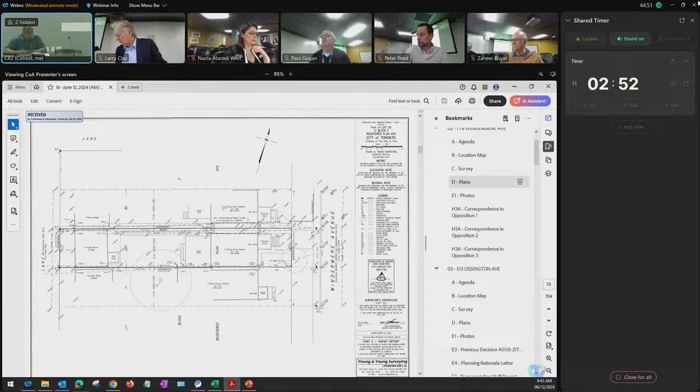The length itself, we are keeping pretty much where the existing deck is today. The length is matching the length of the house to the south, which we do have support on, known as 776.

And then the length itself, right at the end, there is a mudroom that's only 1 story, not a full 3-story appendage.

As for ancillary buildings, the garage, there is an existing detached garage today, which will be removed. And we are putting together a brand-new garage at the back. It is still going to be detached.

The minor variances are setbacks, floor areas, and lot coverage. When looking at the site plan, the two adjacent properties to the north and south, we are again following the footprint as best as possible to what is there today, to mimic the north and south properties.

The only other extra there is a 3-foot extension to the rear, and this is to accommodate larger vehicles today, such as pickup trucks and SUVs, as the garage today is quite short in length.

In looking at Windermere, one of the things that does come up visually while I was traversing the streets to understand the look is that there are many 2.5-story houses on this street, originally built. So by asking for a 3rd story and asking for a minor variance in keeping with the streetscape itself, it's not a street that accommodates bungalows per se, and this will be the first 3-story building.

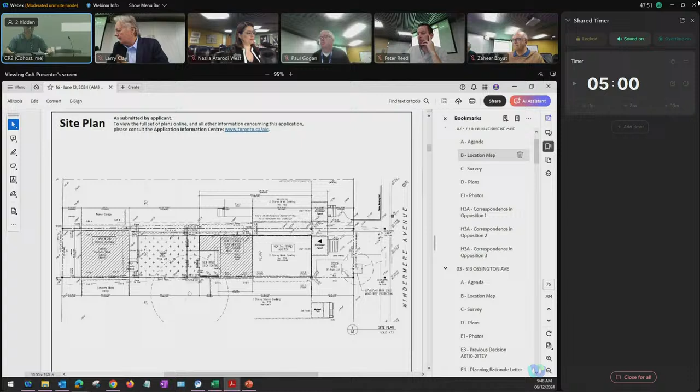Okay. The second question is about the garage height. It was in feet and inches, and I converted it - I think I had it at 5.8 meters. Don't you need a height variance for that? Usually the bylaw requires you to keep it under 4 meters. I'm a little surprised you don't need a variance because it looks like storage or something.

No, it's a car lift, for parking. So I was surprised you didn't need a variance for the garage. I asked the question at the time of our zoning review, and because there was a laneway house being constructed to the south, about 4 lots down, I think that zoning requirement of 4 meters has changed.

Well, I'm a little surprised. I get that if there's a laneway house, but that's because you have accommodation in it. You're not planning to have accommodation in yours? No, there's 2 lifts inside the garage. My client collects cars, so he has a lift going inside the garage where 2 cars will go in, they'll be lifted, and then he can have 2 more underneath. Right, so the garage plans show that.

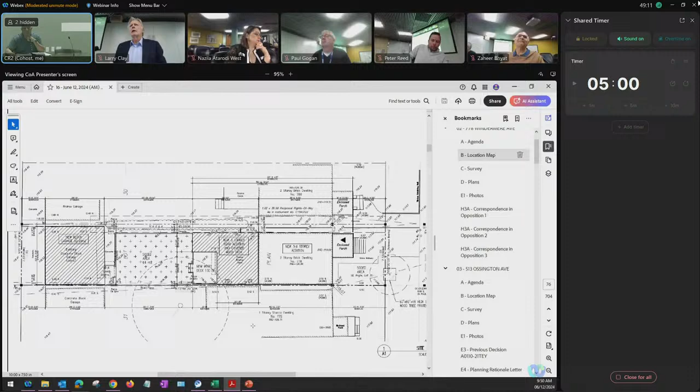I remain a little skeptical on this one. Sabrina, I don't want to put you on the spot, but that strikes me as a little unusual. Through you, Mr. Chair, I'm checking the zoning notice online, and it doesn't refer to a height variance. In any case, if a variance is missed, the homeowner would have to come back to committee with a new application.

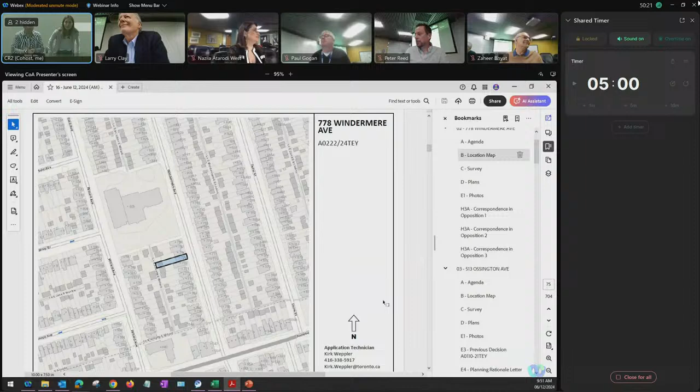Thank you for the opportunity to talk. We've submitted our concerns via a document sent on June 4th to the Committee of Adjustment. The main thing we want to reiterate is that city bylaws have been put in place for two reasons: one, to protect the rights of neighbours, and two, to ensure the city's infrastructure is not compromised and can support new developments. We feel this proposal materially deviates from these bylaws.

The height of the structure is 1.2 metres higher than the bylaws allow, on top of a three-storey structure. The proximity of the house is extremely close to ours, around 5 feet. Both our houses currently are about 30 feet long. Their proposal is to extend the three-storey structure another 20 to 30 feet, up to 56 feet long. With the combination of height and length, this will materially block a lot of our sunlight throughout the day and impinge on the privacy of our back garden.

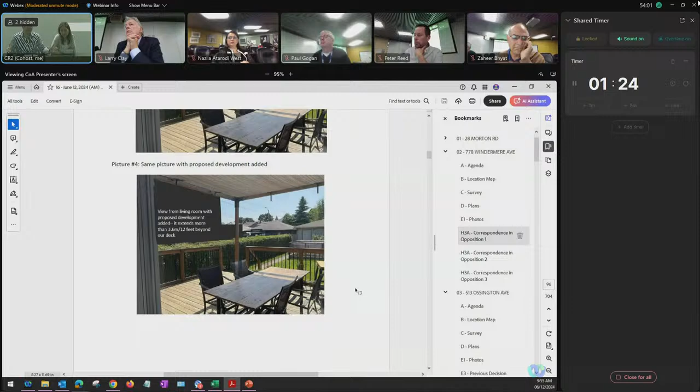The other properties he mentioned on Willard - one has a three-storey, but I don't think the footprint is the same length. I think they've just built it on the same footprint as the existing house and not added the other 26 feet they're proposing. I think that makes a big difference, because the length in combination with the height is where we're finding the biggest challenge.

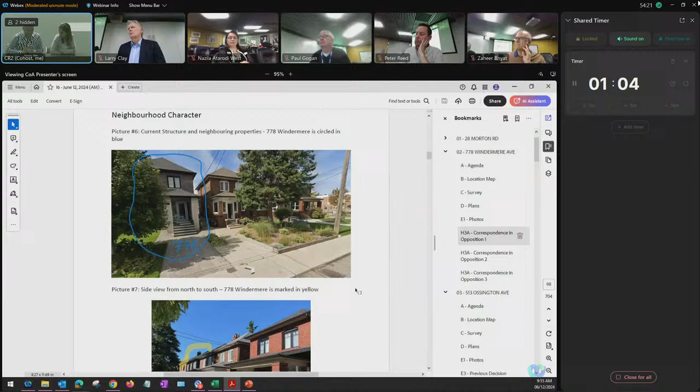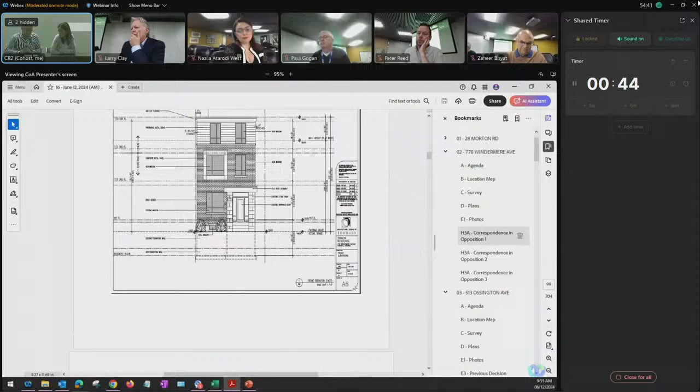And I think the other pictures we're showing also show the impact on the privacy and the shade that will project onto our back garden, and also mainly to our neighbours to the north, who have also submitted concerns with the development. I welcome any comments from the panel on any of the specific adjustments we've objected to in our submission. Thank you.

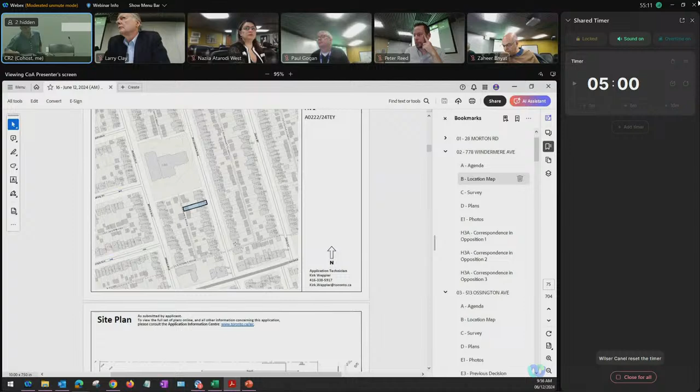The concerns are understood, they have been reviewed. When it comes to the height itself, again, we do address that there are similar homes we are trying to build that are immediately adjacent to this project off of Windermere. Windermere runs north and south.

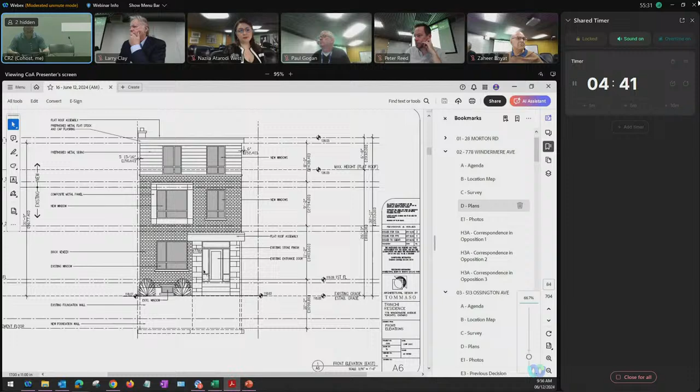We do have houses on Drury, 583, 535, 606. Off Willard, we have 624, 581. They demonstrate exactly what we are looking for to facilitate and accommodate the family requirements. The family is growing. These are smaller homes, restricted with side entrances, so the layouts are not great due to the fact that, to get to the basement, they're just side-loaded.

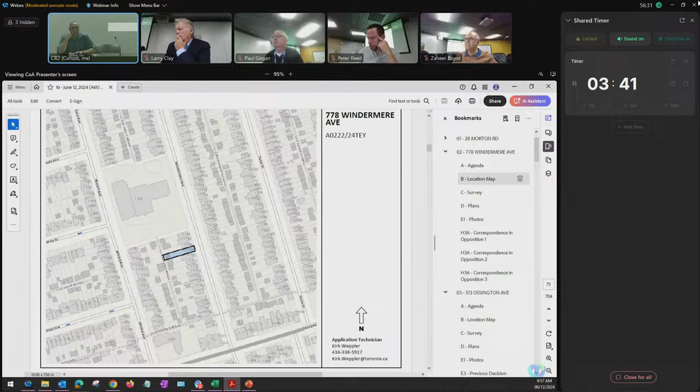As for the concern of the length, once again, we are following the adjacent house to the south when it comes to the depth of the home, and how close it is to their home. This was looked at in detail. Unfortunately, because of the restrictions of the property along Windermere, we have a condition where we're going up exactly the footprint it is today.

So we do have a gable roof. We're going to be removing the gable roof and asking permission for that third storey using the side yard setbacks and the front yard. The rear is a three-storey addition. And if the house is already set close to them, roughly about 5 feet, 6 feet, and we're going straight up, the condition was always going to be there.

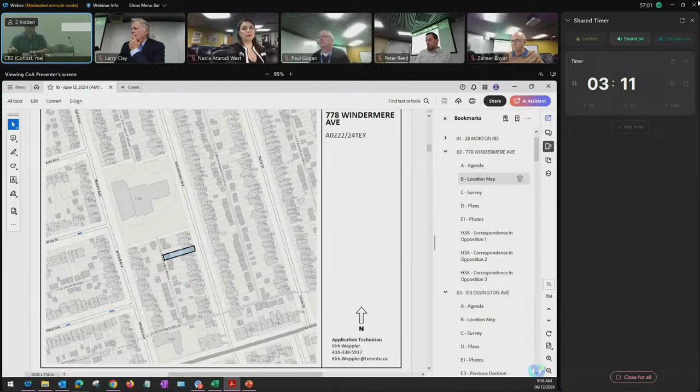As for the landscape, because of the extension to the garage at the rear to make it longer to accommodate the cars that my client collects, it was an additional 3 feet, about 1 meter. And because of the addition to the rear, we ended up with a smaller percentage of landscape. However, looking at the house to the south, with its length and pretty much the same footprint of the detached garage, their landscape area is equivalent to ours being proposed today.

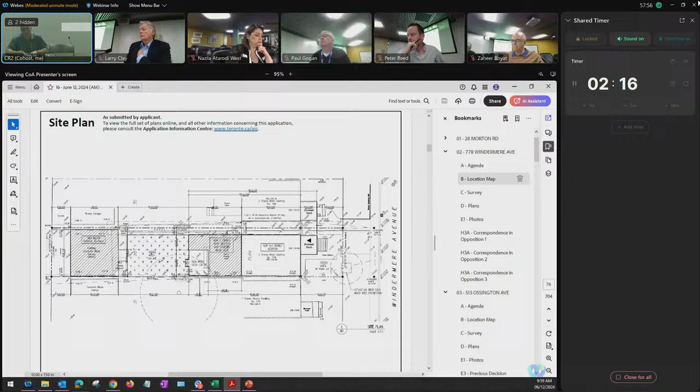To conclude, of the 11 minor variances presented today to committee and reviewed over the last several weeks, 6 of those are of existing conditions. They'll talk about eaves, side yard setbacks, and these are just things that have been triggered because of existing conditions of the dwelling, the single-family dwelling today. That's all I have for now.

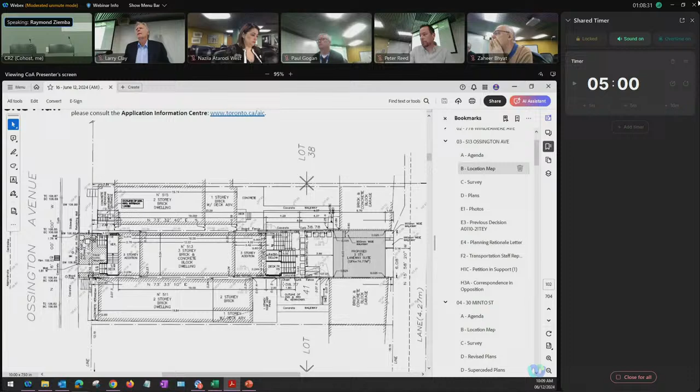Okay, sorry Peter, go ahead. No, you go Larry. I was just going to ask about the stairs in the rear that you are showing on the plan, are those wooden stairs? I guess the question is, is rainwater able to make its way down through those stairs or platforms into the ground? Yes, if you look there are photos attached, they're metal stairs, and water could go through. Okay, thanks.

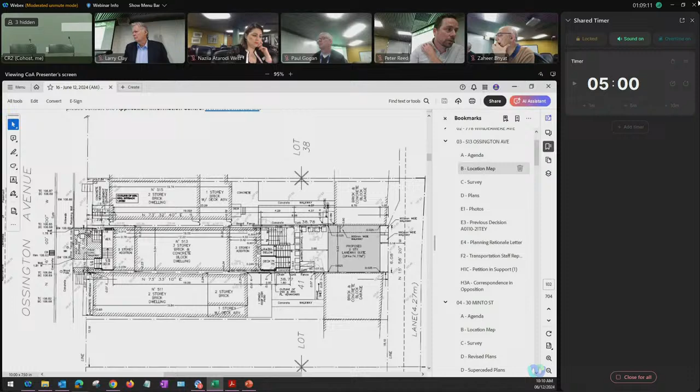Peter. Yeah, thanks, to the applicant, you noted that you're providing more than is required in terms of soft landscaping on the east side fronting the alley, did you say 5.25 square meters? When I did the measure, it was about 5.5 square meters. Okay, and are you okay if this gets approved, if that is a condition of approval, that 5.5 meters be provided? I think it would be better to tie it to plans because I just did an overlay, and that's why I'm saying approximately 5.5, I didn't, I did that as a quick estimate on my own.

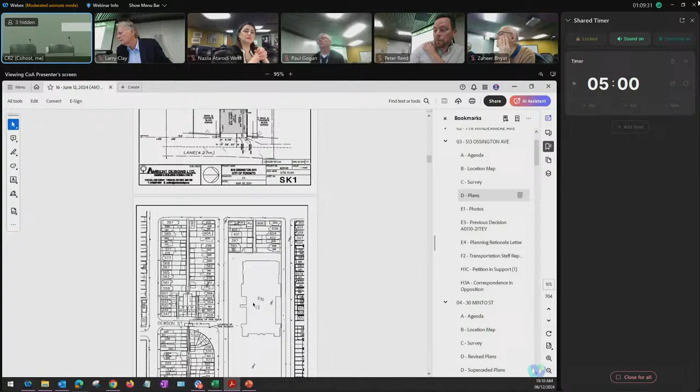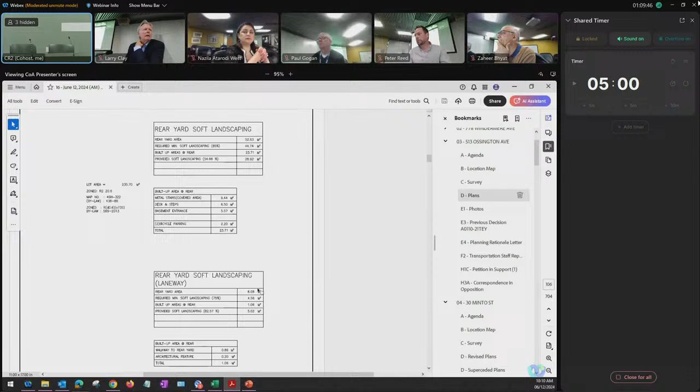Peter: I'll start, thanks Chair. I agree, I mean I wish these applications could satisfy the soft landscaping, and it's a thing we come up against often now, particularly when sites are being redeveloped intensively like this. But I do think there is a benefit in having lots with 5 units through, and I think that kind of variance, particularly if we can make the rear yard against the alley condition green, lessens the impact of it. So I think it's a reasonable application, particularly because all of the built form requirements of the laneway suite are met. Thank you. Anyone else?

No one else? Okay, then I'll look for Peter. Want to make a motion? Sure, I'll move a motion for approval of the application, subject to the condition that a minimum of 5 meters of soft landscaping be provided to the rear of the property between the laneway suite and the laneway.

Motion to approve with that condition. Can I, through you Mr. Chair, have a friendly amendment that transportation also have a condition? The report on June 5th, the 0.37 meters. Okay, if that's accepted, then thanks.

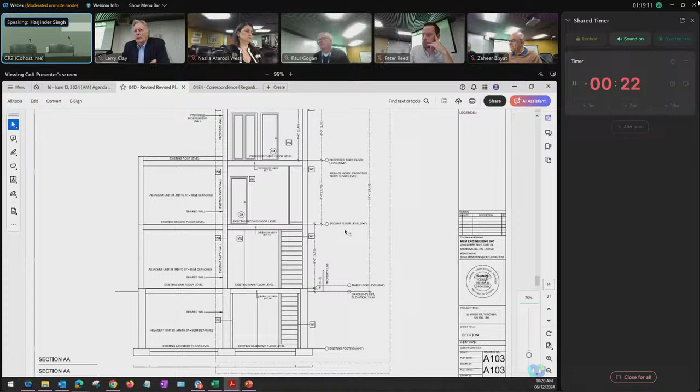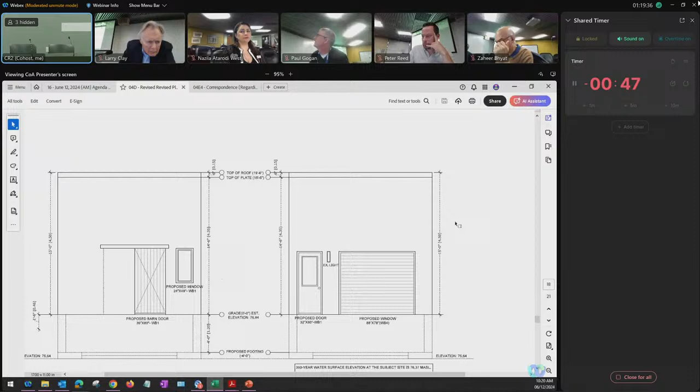Okay, let's just, I mean, it's really important that we have the correct and accurate information. Through you, Mr. Chair, it is under the very late materials, which the members wouldn't have received, so we'll have it presented on the screen. Is that what we have on the screen right now? Okay, can you just zoom in so the members can see the 4.5 meters? Okay, so these plans were submitted, I'll just get the date, sorry.

So is that a sloped roof then? It looks like, is this 4.35 on one side and 4.5 on the other? Am I reading that properly? Yeah, so it would be the highest point, right? So it's a bit of a shed roof then? Yeah. So these plans dated or received June 10th.

Okay, if the committee is inclined to approve as amended with condition. Okay. All right, and the planning condition is tied to these most recent plans, right? Through you, Mr. Chair, I believe the planning condition was the June 5th plans. So if they've been recently revised, then I would change the date to June 10th. Right, okay. That's great. All right, I think we're clear on this one. Any further questions of the agent?

Okay, we'll take this into committee.

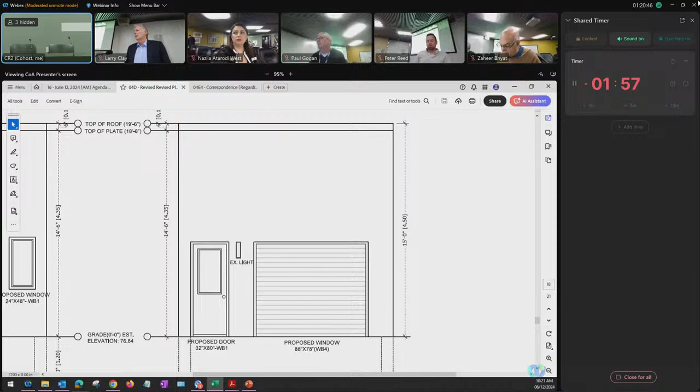Who wants to start? Nazila? Yes, through you, Mr. Chair, just a quick question from Madam Secretary Treasurer. So we received the staff report dated June 6th, and it had a condition. So if we want to put the same condition, do we need to update it with this revision, or can we keep the same condition attached to the revised drawings? Through you, Mr. Chair, you can use this condition, but just update the June 10th date to match the most recent revised plans, or you can impose your own condition approving the site and elevation plans dated June 10th. Okay, thank you. Okay.

All right, anyone, Paul? I'll move this application. That we approve it as amended, with variance number 1 and the modification to variance number 2 to 4.5 meters as the ancillary building height, and with the removal of items 3 and 4. I don't believe there's any comments from TRCA, but no additional comments. And I do find it minor in nature. I think the proposed modifications, there are no variances for the proposed third floor addition, and I think all the requested variances are minor in nature.

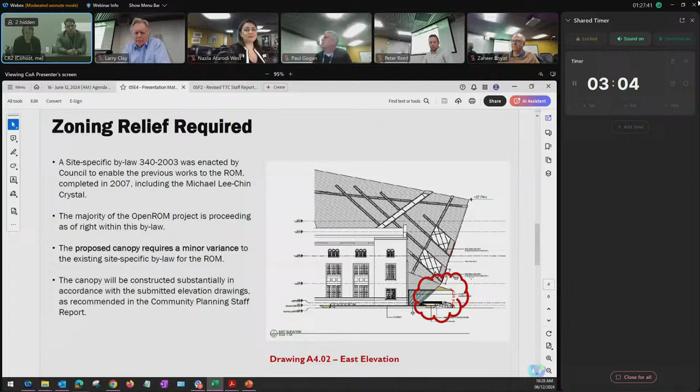There was a site-specific bylaw to enable the original crystals and the development in 2003, and a canopy of this nature was not anticipated at that time, so there isn't a standard for projection. What we're seeking is to enable the canopy to project. The canopy itself varies in depth because of the nature of the angles of the crystals.

It's an overall height of 4.84 meters, and the depth varies depending on where you are within the crux of those crystals, between 4 and 16 meters deep. The image on top shows the full extent of the canopy as if the crystals above were removed, and the image on the bottom shows how the existing crystal will actually project over portions of the canopy, giving a three-dimensional expression within the crystal.

There's no projection into the right-of-way, which was the subject of comments from ECS that was clarified with them, so they no longer have any concerns and withdrew that comment. The canopy is fully within the property line.

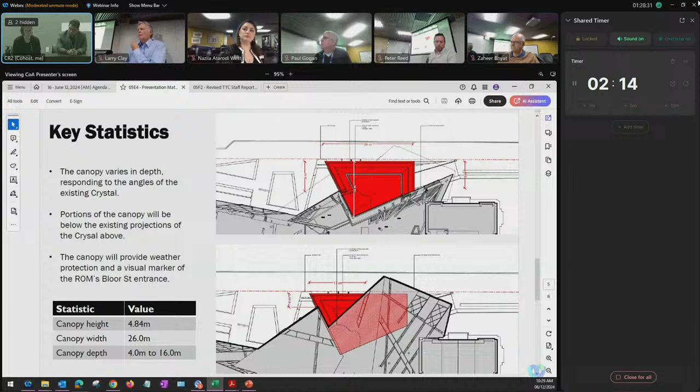From a planning perspective, this clearly meets the four tests of the Planning Act, being quite minor and meeting the intent of the OP and the zoning bylaw. It is a desirable change for the reasons I mentioned regarding marking the entrance and weather protection, and will contribute to a significant updating of a very important cultural landmark here in Toronto and Ontario as a whole.

We note there is a recommendation from planning that, should the committee approve the application, it be built substantially in accordance with the drawings, and we agree with that recommendation. I've mentioned that the ECS comments have been clarified.

Urban Forestry's comments have been clarified as of this morning. They had inappropriately identified a tree being impacted by the canopy, which in fact it does not, and they clarified that via email to us this morning. As for the TTC, we understand their standard comments related to the planning application, so we accept those notes from the TTC.

So I think hopefully that clarifies things. Yes, thank you, that's all we have. Any questions, panel?

Just a detail question: where does the water go? Good question. There's a central column, and they all back-feed towards the central column, going down through the foundations.

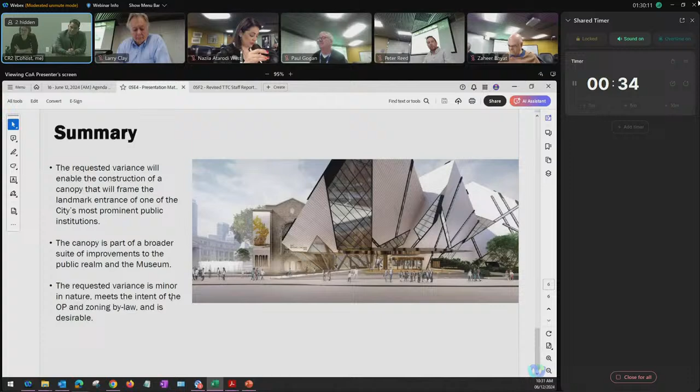I've heard that the applicant mentioned that, because we have a report for condition number 2, urban forestry, that this condition has been waived. Yes, as of this morning we've clarified with them there's no tree that they thought was being impacted.

So then, through you, Mr. Chair, I would err on the side of caution here. We can still impose the condition, and it would just automatically get cleared before the building permit, just because staff haven't received that notification. Thank you, we've all been there. I don't think there's a tree, but...

There's no trees there. It'd be nice to have a couple trees there, actually. But I think that's good advice, we understand that, it will get cleared quite quickly.

Okay, all right, let's go into committee. Who wants to take this? Peter will take this one. Thanks, Chair.

I think this is a good application, a good project that improves the pedestrian realm and the accessibility of this. I can see no negatives to approving the variances being asked for. So I move approval subject to community planning condition, urban forestry, and TTC conditions.

Okay, and there's no longer a transportation condition, right? So, okay, seconded by Ms. West. All in favor? You have your approval. Thank you very much.

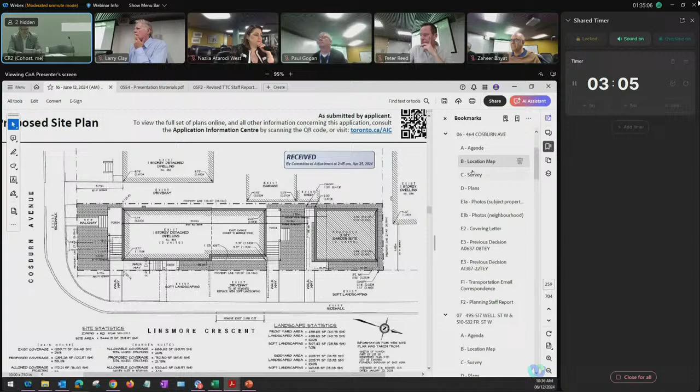If I can get page 11, the east elevation on the submitted plans. So the variances for this garden suite are basically generated because of this lot. This is a corner lot. There are flanking setbacks because we have properties to the north that front onto Linsmore. And one more, page 11 should be the east elevation of the garden suite. Keep going.

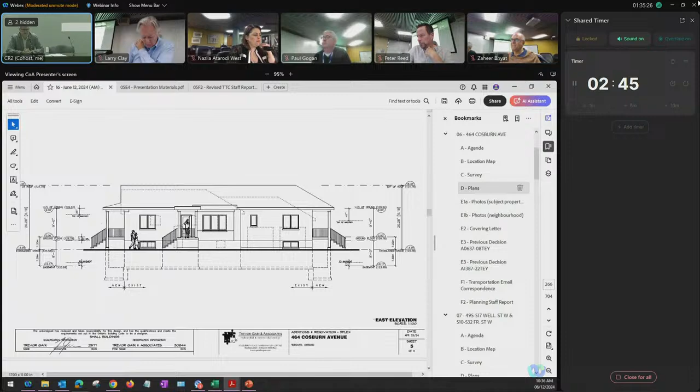That's fine. So the dotted outline that overlays on the structure — those are the existing setbacks and the angular planes. It's basically the size of a single car garage, 1 story. Any development in this rear yard, including the previous garage that we did get approved at this committee, which was a double car garage, included minor variances in massing, size, and setbacks. What makes this application a little unique is that when you drop the garden suite bylaw on top of this, we end up with these variances.

But this is a corner lot, so typically their spatial separations and setbacks address mid-block houses. This is a corner lot, so everything is addressed to the street, Linsmore Crescent. By doing so, spatial separations, overlook massing, and even soft landscaping are mitigated based on the large boulevard.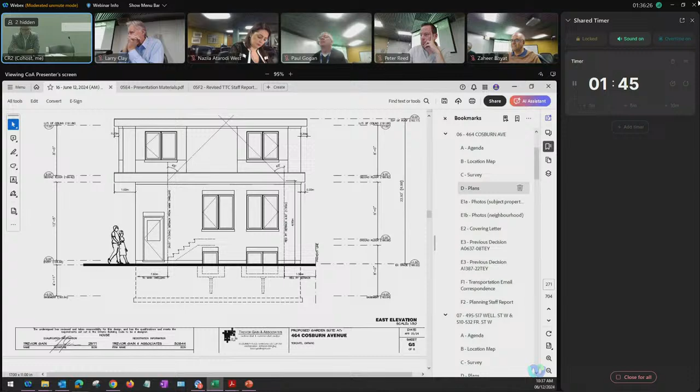Can you bring back the site plan, page 1 again? This boulevard section, the dark shaded area, is our soft landscaping proposed on the property, but there's another 5 meters of soft landscaping to the sidewalk. There's an existing double car garage at the back of the bungalow that will be converted to habitable space, so that driveway on private property and on the boulevard will be converted back to grass. The only hardscape that'll come across now are just the walkways to service these units.

Again, the spatial separation: we have 5 meters between the bungalow and the garden suite, which accommodates a 1-story structure, but for 2 stories we need 7.5 meters. Again, this is mitigated because of the orientation and the open side of Linsmore Crescent on the flanking street.

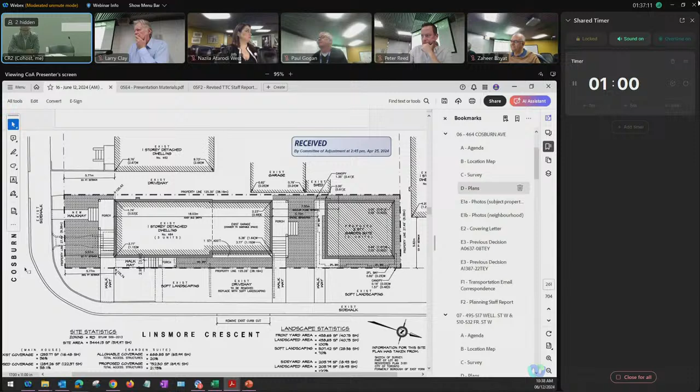Regarding massing, if I can get my submitted photos up, under supporting materials — I think it was submitted on June 4th. Yeah, thank you. So across the street, as I mentioned, is a mixed-use building, which is photo B.

Actually, we got different photos. Anyway, so there's a mixed-use building, 2 stories. That building extends for about 30 meters from front to back. Our proposal is 32 meters front to back, which also includes that 5-meter separation.

So the massing on this property is all pushed towards the back of the property. We're maintaining the bungalow status at the front, which continues along Cosburn, but at the back is the massing. So eventually, like most bungalows in East York, there will be 2-story structures to the rear.

So what I'm trying to get at here is that I think our massing is not really out of character based on what's happening across the street and probably what's going to happen in the neighborhood as all these properties get developed. So just to wrap it up and to conclude, we do feel that this is an excellent opportunity towards the housing crisis as the introduction of 4 new dwelling units, 5 in total.

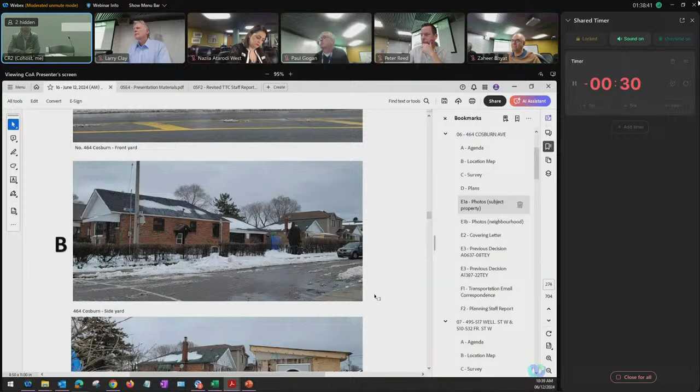Unfortunately, this does not fit into the mold of what a garden suite is according to zoning bylaws and city planning. But given this is a corner lot, given it's on a major transit corridor, Cosburn Avenue, the proximity to parks and schools, the mix of 3-bedroom and 1-bedroom units, we think it is desirable. You just simply have to think outside of the box on this one based on its context, because it has a great potential for positive impact on the community if you approve it today.

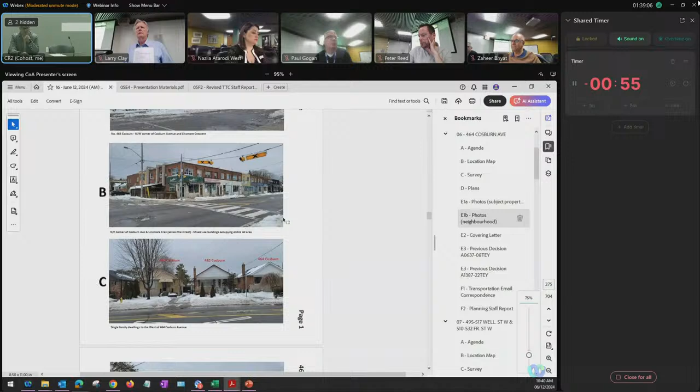You or your client have had discussions with the surrounding neighbors, have you? We have, that's why we have no opposition. We vetted it all out and just told them what we're doing. Like I said, they've owned it for a long time, so they know all the neighbors quite well, and we have no opposition.

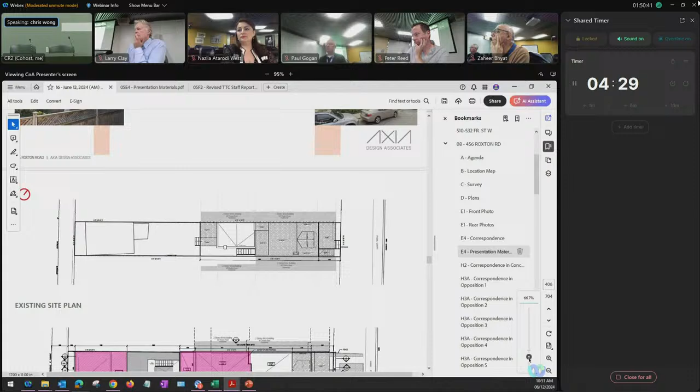We're proposing 2.5-story additions at the back with a 3rd half floor and a terrace facing the backyard, along with a laneway suite in the rear yard abutting the laneway. There will be a total of 4 residential dwellings on this lot, replacing the existing 3.

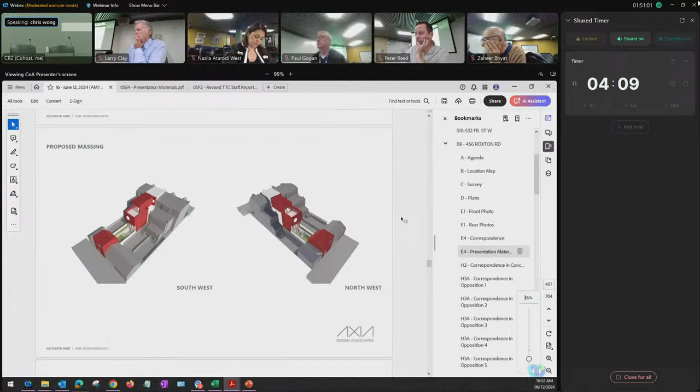Here are some of the massing views. This one is from the backyard, with the proposed shown in red. The next page shows the views from the front, which we are keeping pretty much as is.

The proposed ground floor and basement will be 2 separate 1-bedroom units, highlighted in green, while the 2nd and 3rd floor will be a 3-bedroom residential unit, and the laneway suite is a 2-bedroom unit. These will all be purpose-built rental units, aiming to supply the much-needed rental market in the city.

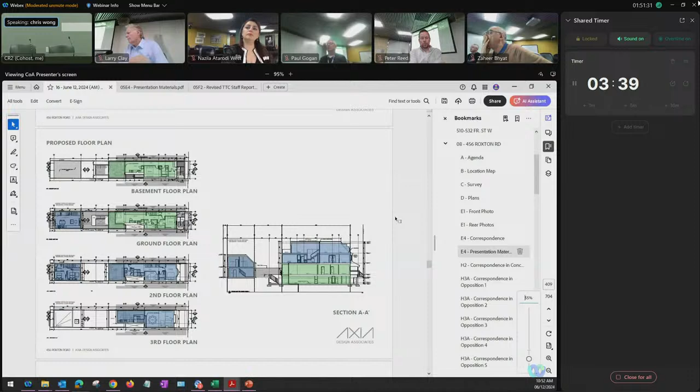Access to all these units is from Roxton Road, except the laneway suite. Given its proximity to the Bloor subway line, the owners have committed to only rent to people who do not own cars, so we do not intend to add any additional parking load to the neighborhood.

Currently, we are seeking 3 variances. The first 2 are related to the percentage of green space on the front yard, and the third is related to the location of the stair to the basement unit, also at the front. All 3 variances are pre-existing.

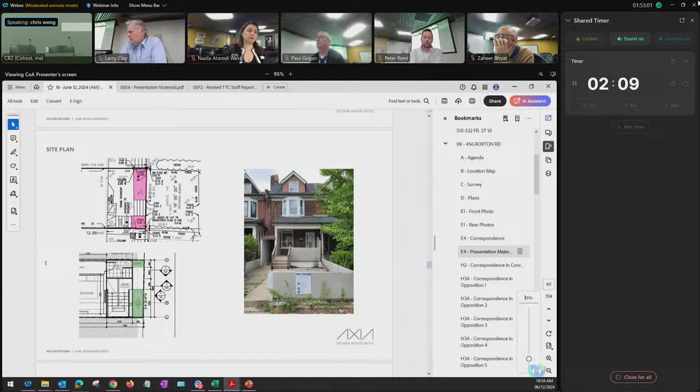The areas that are left are highlighted in green and will be planted. We also intend to add large planters between the front property line and the sidewalk. If you go to the next page, you'll see the next rendering.

This is outside of the property line, so technically the area doesn't count. There's a total of about 14 square meters, which is larger than the zoning requirement of 12.63 square meters.

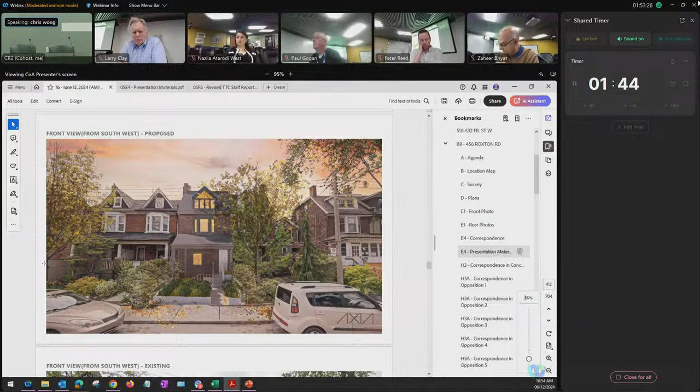Lastly, we also want to indicate that we intend to respect the heritage characteristics of the existing buildings that make up the unique streetscape of the Roxton neighborhood. We intend to keep the front facade as close to the original as possible, except with new glazing and a bay window upgrade, as the building currently has some moisture and thermal insulation issues.

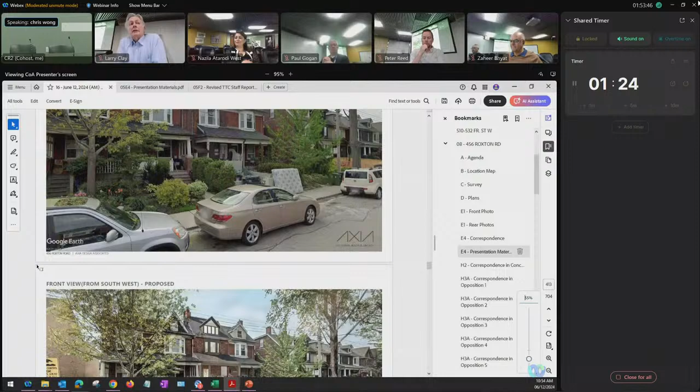On the 3rd floor rear, there's a terrace. I was looking at it and I can't quite tell, perhaps I'm not reading it accurately, but I believe it's on the east and west sides. Is there overlook over the neighboring properties from that terrace?

Currently, the north side has a terrace. I don't know if the south side has one. But the terrace, the north side terrace is, if you see on this page, go back a page, you see the north neighbor's extent is sort of east of the new extent of the terrace. If I explain that correctly, sorry if that's confusing. I can't quite see it, but you see the north neighbor? This is on the right side of the image, the top of the image.

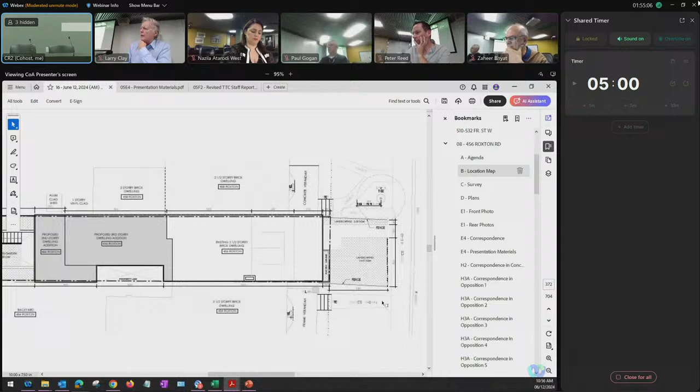Why don't we pull up the rendering? Can we pull up the rendering in the presentation materials? Sure, yeah, the 3D model rendering. I think that shows it a little bit more clear. Yep, just a little bit further down.

There it is. So I think your question is with respect to what looks like a terrace on the top floor, is that right? I think so. Is it on the second floor, not the third level? Or is it the third level? It is the third level. The terrace is on the third floor for our proposal.

So it looks like there's a wall there. Okay, there's a wall on one side. Is it a wall on both sides? There's a sort of setback on the south side. Okay, so it's almost like a light well kind of scenario. So there shouldn't be any overlook issues? No. Okay, thank you.

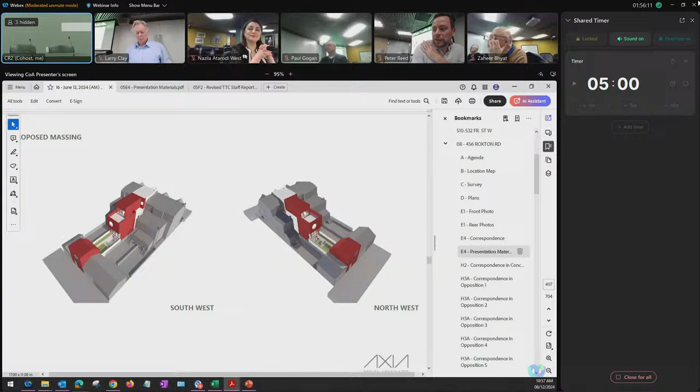Okay, thank you. Anything for Peter? Just one thing to the agent. As you know, there's a lot of neighborhood and neighbor concern, and their concerns are generally about the built form. But I'm just confirming that all the extension in the back and the laneway suite, those are as of right. Correct. Yes. Okay, thank you.

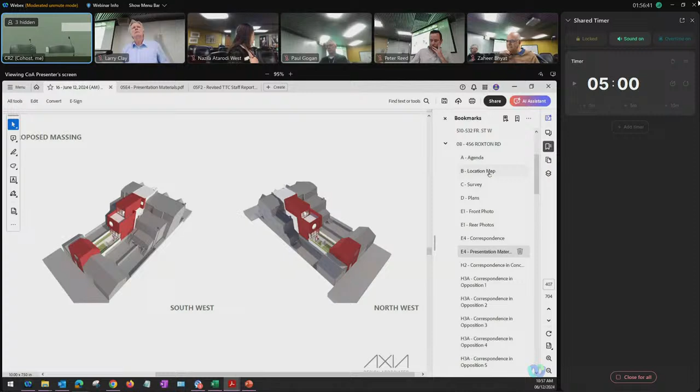Good morning, sir. Good morning. My name's Howard Monroe. I reside at 460 Roxton Road.

We have some concerns about this renovation, and I get that the city's trying to increase density in the neighborhood, and this house has been derelict for a long time, and I totally support the renovation.

We do have some concerns about the landscaping reduction in the proposal, decreasing landscaping from 100% to 51.8%, and 75% to 20%. This raises a lot of environmental issues, aesthetic issues, and privacy issues for the neighbors.

The agent did say that there's a lot of concrete in the front, but the rules for landscaping, the rules for zoning are put in place for a reason. If there was a pole in the way, or some crazy thing that you needed a variance for, that's not the case with this building. Rules are rules. As citizens of Toronto, we have to abide by these rules. Your job as the Committee of Adjustment is to uphold these rules.

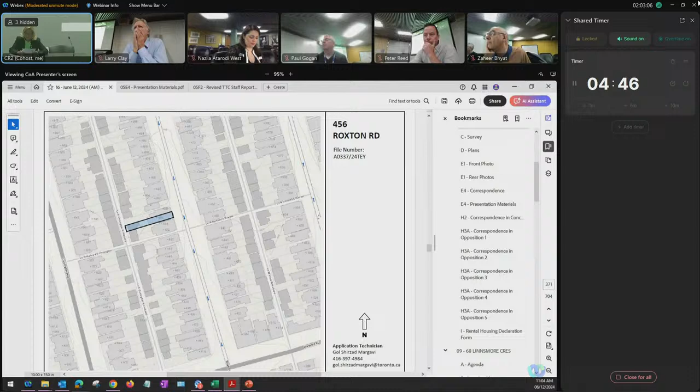My name is Alicia Stefurek. I'm the owner of the triplex at 458 Roxton Road that will be directly impacted, we share a wall. I've been the owner of the property since 2010. It's currently a multiplex housing divided into 3 residential units. I was providing drawings from 1996. The 3 units are contained within the original envelope of the building, built in 1904, and meet the requirements of the FSI, Floor Space Index, prior to 2023. Over the last 14 years I've spent hundreds of thousands of dollars updating each unit: kitchen cabinets, flooring, fire safety, and most recently, during the pandemic, I updated all the electrical service, furnace, windows, hot water tank — basically everything possible given the conditions at the time.

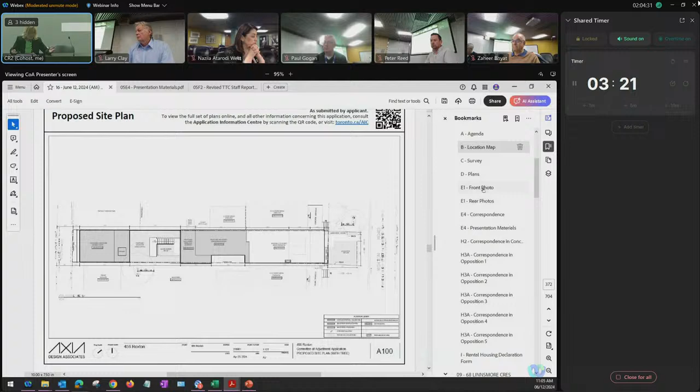The proposal directly affects me. The 3-story addition basically blocks the entirety of my roof deck on the 3rd floor. If you look at my correspondence materials, I submitted a whole binder of drawings showing all the views from the 3rd floor — it's a 3-bedroom unit, and that outdoor space is the main attraction. There's going to be a 15-foot wall, 40 feet long. There'll be no light to the bedroom, no light to the roof deck, making it basically useless. It'll decrease my rent and also decrease the value of the property.

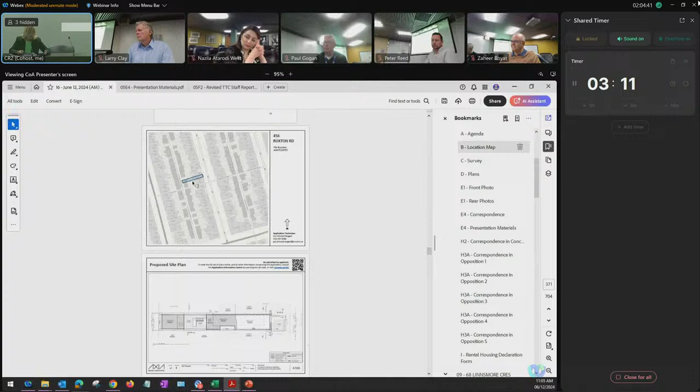Also, the two-story addition will block all the natural light to the kitchen window of the unit on the second floor. After all the hundreds of thousands of dollars I put in — I invested basically for retirement — in one year they purchased this property in 2023 and most likely will sell it after construction is finished. It's going to directly decrease my income, decrease the value of my property, and negatively impact my financial status. So I urge you — are you able to bring up my supporting documents, my binder?

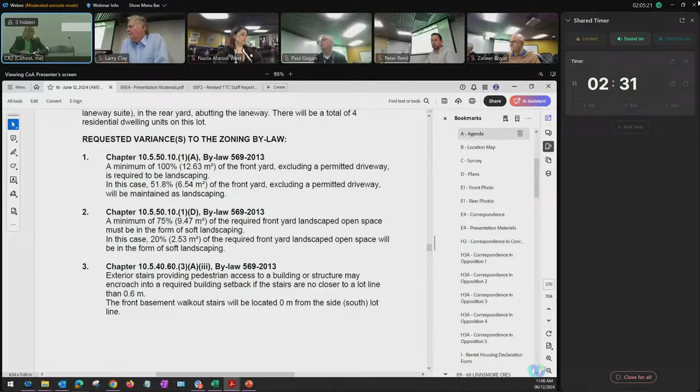Yes, we can bring up the views from the roof deck. So basically, it's going to be people looking at a blank wall. If you look at their massing model — I'm not sure what time of day that massing model was produced — but basically the entirety of my landscape, my garden, the roof deck will be in shade most of the year.

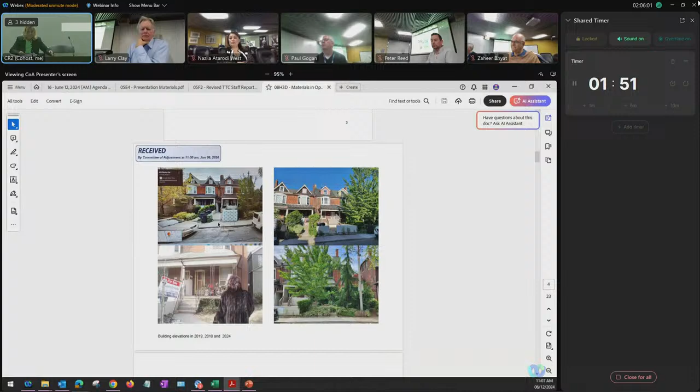And interestingly, when you ask about privacy issues, they're going to completely block my third floor deck, but they've extended the building so their own roof deck isn't obstructed and gets entire views over the neighbors. So there is direct overlook. And interestingly, they put in a solid wall around their terrace so they get complete privacy while we get overlooked. They've blocked the entirety of my roof deck and extended beyond it so their tenants get the benefit and increased rent. That's my garden that I've completely landscaped — it'll all be dead because there'll be no sun.

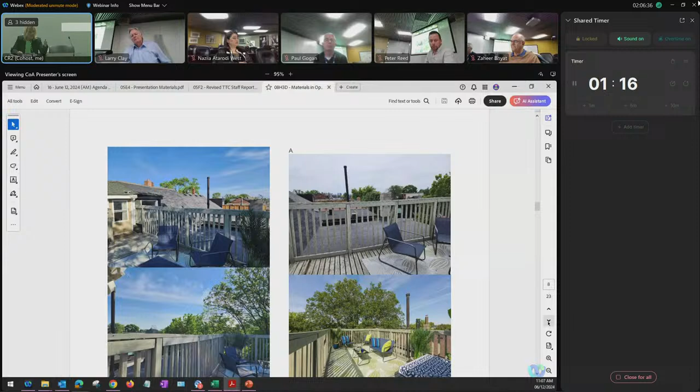That's the roof deck. So that's one window—obviously the two buildings are similar, they match, they're built at the same time. There'll be no light, no view, no sun. And I'm almost positive the roof deck will be damaged, the basement will be damaged. Anyway, that's it.

It's a rental unit, so during construction there'll be noise, there'll be dust, and it'll be difficult to rent. It's been a rental property for 30 years, so my tenants, the people living in my multi-unit, will get diminished services, and you're prioritizing people building after 2023 when the zoning changed.

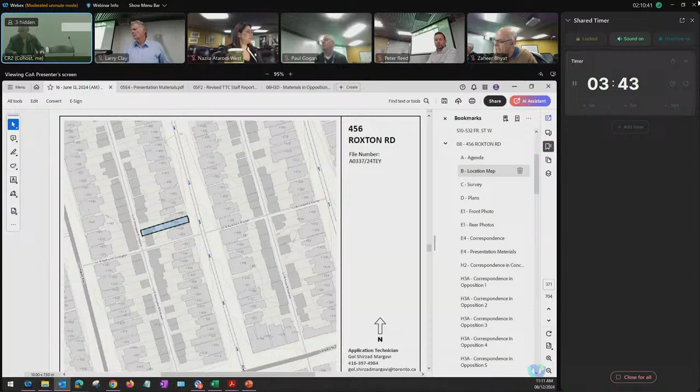He says they're only going to rent to people who don't own cars. Well, we don't know—you can't get rid of tenants once they're in. They have to do something egregious, okay? There's already a shortage of short-term parking. I've observed residents of Ossington Avenue parking their vehicles on Roxton. We cannot sustain this greed-motivated, over-large development.

Further to that, the agent mentions that he will plant on a, quote, city boulevard, unquote. There is no city boulevard. It's the house, a sidewalk, a narrow curb, and the street. There is no boulevard.

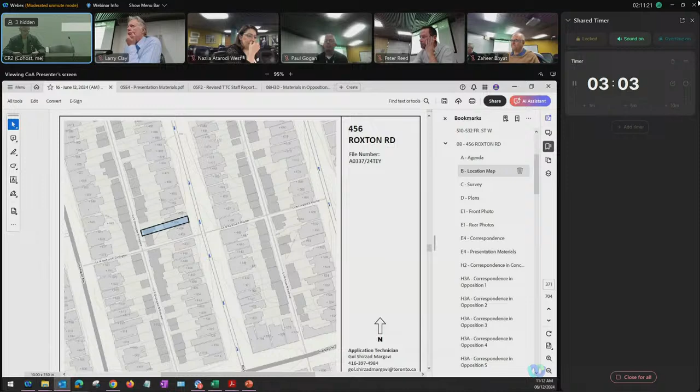We're concerned about potential noise and garbage and littering. I mention it because I've observed it in neighboring places. More people means more garbage and more noise. This place could very likely become an Airbnb or short-term rental. We have no control over this. This is going to put even more people in the neighborhood who have no vested stake in it, and more noise, more garbage.

As Howard mentioned, there are 2 mature trees—one at 454, a big tree, and one on Howard's property. If a root gets cut and the tree dies, or branches are cut and the tree dies, sure, the developer's going to have a fine. Is that just the cost of doing business?

I'm very concerned about the Laneway House. The Laneway House next to my place at 450 was a 3-year project. The noise, the dust, the impact on laneway traffic, like a cement truck ran over the apron in front of my garage, cracked it to pieces. I had no redress for this, no matter what I said, and I can't afford to launch a lawsuit.

Furthermore, where are all these construction vehicles going to park? How can people get into their garages with these construction vehicles? Just the other day down the street, there was a big cement truck. Nobody could pass. And on top of that, even if you can, these vehicles very often get in the way of people maneuvering their own cars to get into their garage. If these big vehicles park on Roxton, what kind of impact is that going to have on traffic, particularly on garbage day?

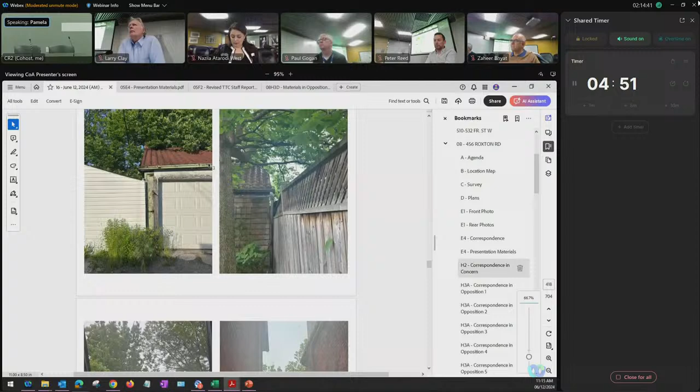One item in particular is the property line. It seems that it's going on top of it and in some cases actually over it. In particular, the second floor addition would go over into our property line, but the build itself is crossing it over or touching it a little bit more than I think is probably allowed. The tree has been mentioned as well. We do have a substantial tree in the back, and I am somewhat concerned about how that will survive all the backyard renovations.

As you can see with this photo, this is the garage that we currently have. I'm not sure, based on the designs put forward, how they would plan on building it without knocking into our garage and possibly damaging it. As an old garage, any kind of shifting or hitting of it would probably damage it and not allow it to work properly. So there are some concerns about how close they want to build it.

In regards to the laneway house, as I mentioned, we are concerned about the touching of our current garage. The eaves trough that is there, I don't know if that's actually been taken into consideration. It is a small lane that we go into, so anything that goes out would make it very difficult for us to pull into our small garage, which we depend on for parking.

And of course, the addition itself is probably our biggest concern. There are some photos where we did mock-ups of what we feel it would basically essentially put a wall into our backyard. As you can see here, our view into the backyard would remove most of the green that we can see. For many of the windows we look at, most of our windows face west because we are a very narrow property. So basically any window I would be looking out would be looking out onto walls, losing a lot of the green open space that we really quite enjoy.

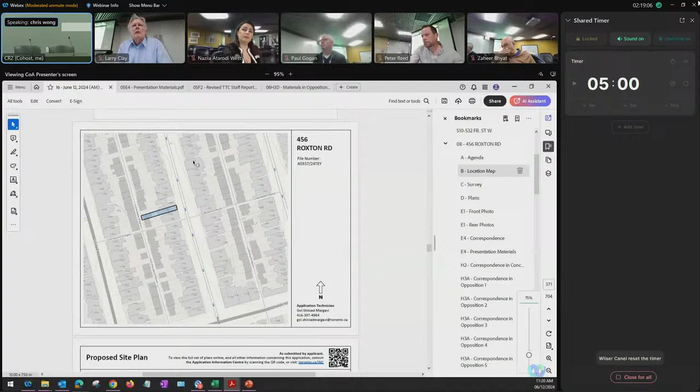I have. First of all, in terms of the smoke alarm, I'll contact the owner right away and get them to turn it off. I'm not too sure which one it is, but we'll rectify this immediately.

In terms of the other concerns, some of the major ones like light, sun, and view - we are all located on the west side of Roxton Road, so every property receives western sun, and of course views to the north side. So for our north neighbors, yes, we do block a portion of it, but at the same time the amount of light you can receive in the afternoon is still there. We're not blocking any of that.

And to our south neighbors, I understand there's going to be a wall built up to it, but with all due respect, we are working within as-of-right conditions, and these pertain to the length and the setback of the proposal, which at the moment has gone through the setback applications. With all due respect, that's not the variance we are seeking right now.

In terms of the noise, I understand there will be noise during construction, and we will stick to the schedule as allowed by law, and try to minimize any kind of inconvenience it may cause. The tree, of course, is a concern for our neighbors and also for ourselves, so we have an arborist on board and will follow all instructions from urban forestry, which I believe is condition number 1 and 2 at the moment.

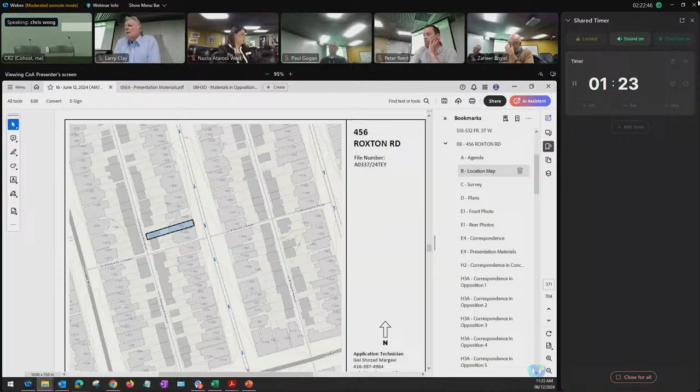Sorry, one more thing about the landscape. As I said before, this site is unique in that the property line comes all the way up to the porch, so there's very little area for us to do landscaping, but we are committed to landscaping outside of that line up to the sidewalk, as you can see from the images and the site plan. Sorry about that, Mr. Chair.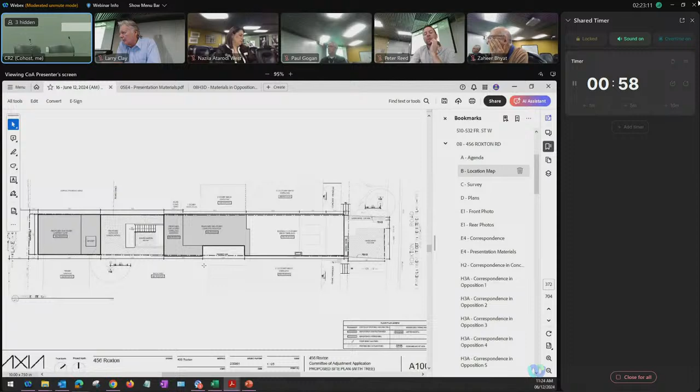Thank you. If we could pull up A100 - that's exactly what I was looking at. I'm looking at the southerly border. First of all, it does appear, at least from this rendering, that your structure is poking outside the property lines a little bit on the proposed second-story addition. I wonder if it's a graphic issue, like the printout.

No, I think you're going to have to resolve that boundary issue. But also, you're building the second floor addition right up to the property line - you don't require a setback? It strikes me that there is typically a setback provision between you and 454. I appreciate that's not a variance before us, but I'm going to check with Sabrina on the zoning notice - don't you require a setback for that?

And it looks like for the laneway suite, you've got an as-of-right laneway suite, but you're right up to the property line on both sides. Is there no variance required for either of that? We do not receive any variance in both situations. Okay, we don't have that before us, so the zoning examiner hasn't identified that as a variance - it does seem odd.

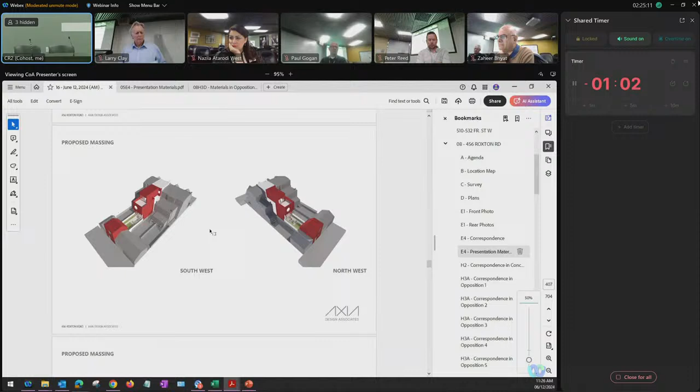Anyways, thank you. Panel, any questions? Zaheer? Thank you, Chair. I was just going to come back - thank you for the explanation regarding the front yard soft landscaping issue. Just looking at your presentation materials, I come back to the question I had earlier about your third floor terrace. From the 3D rendering, the southwest image, it looks like you've got overlook on both the north and south sides.

So we are interested - we can do a privacy screen if that's needed. Yeah, I think that would be quite important to have there. I think one or more of the people in opposition raised that as a concern. So I'd like to add a condition that privacy screening be provided on the north and south sides up to 1.5 meters. Okay, yeah, we can certainly do that.

Thank you. Paul? My comment is just - I was surprised that there was no setback for the garden suite on the north and south. And I think the graphic issue is, when you have common walls on attached buildings, once you leave your attached portion, you have to comply with the building setbacks and property lines as well. So you should look at the graphic, at the way it's drawn, because it's shown as extending walls that are currently common forward, which won't be common in the future. I think you should look at that going forward.

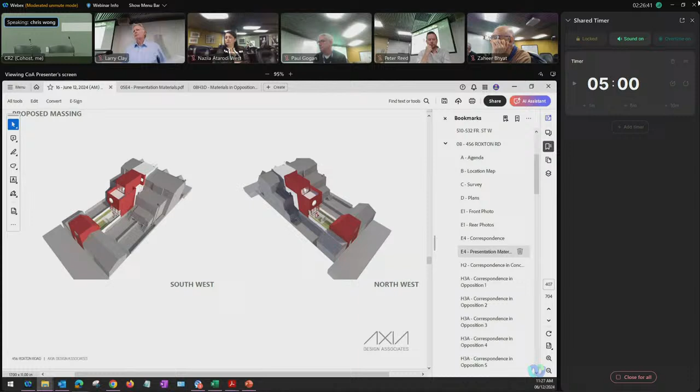Yes, we will, I'm sorry about that. But in the future it will be all within our property line. Sorry about the graphics. Anyone else? No, thanks. Okay, thank you, sir. We'll take this into committee.

I'll kick it off - sure, Paul? So this is an interesting situation where a lot of the comments we received from the neighbors, which we welcome and are glad they participated, relate to what seem to be as-of-right conditions. We appreciate that feedback - it's always good for an applicant to hear it, but what we're talking about today is the landscape for the front yard. The landscape is unique in that it's effectively very close to the property line. So I would move that we approve these variances that are requested.

We can't guarantee that he will landscape the front on the city property, but it is suggested that he will. I think the variances are minor in nature for the landscape, the three variances, and with no... it's forestry 1 and 2. So with condition, forestry condition 1 and 2.

Motion to approve this. Sorry Chair, if you might add the friendly amendment from Zaheer about privacy screening on the north and south side. North and south? I believe it's both sides. The only thing I would say about the north side is that I think the neighbor there was concerned about having a tall fence on that side, because her tenant was concerned about loss of light.

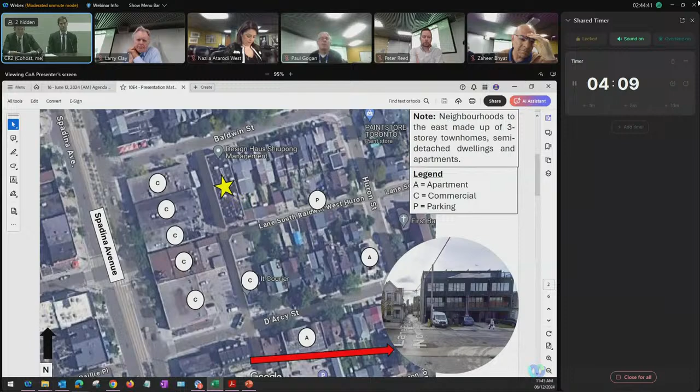This is taking a look up the laneway at the building that's there. What you'll note is this has been a commercial building for many years, virtually covering the entire lot. So the density of that building is about 3 times the area of the lot. Our density for this infill will be about 1.79 times the area of the lot, so we're actually under what the historical density was. The densities of the buildings in the area and the commercial around there are much higher than what we have here. The next one.

So what we're trying to do here is show you some of the technical nature of the variances. What we've learned dealing with this with planning staff is that the infill housing, laneway housing bylaw that has attempted to simplify the process hasn't hit all of the standards. For instance, when we look at the envelope now compared to the old envelope, we have setback variances despite the fact that we have better setbacks than pre-existing buildings. We have landscaping provided between the building to our east, whereas previously none was provided. We have setbacks that relate to roof enclosures, I'll show you in a minute, that talk about main walls, but it's not really main walls, it's just roof enclosures so that we can have access to a rooftop amenity area.

We have, as part of the design here, at-grade patios, which are slightly above grade, a feature we worked on with city staff so we can provide landscaping separation and create variances. We have the width of dwellings, slightly narrower than the required 5 meters, which allows us to get 8 ground-related units that fit quite nicely.

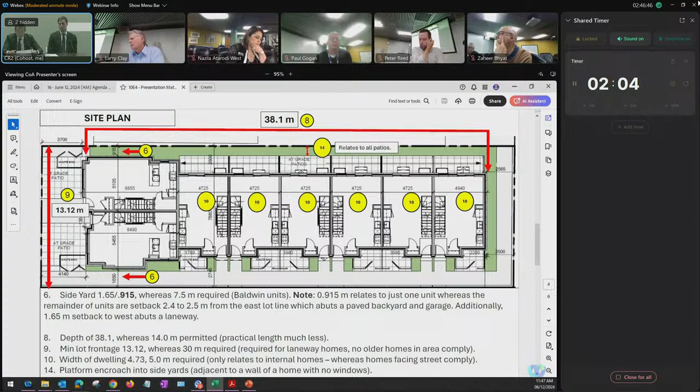If I go to the next slide, what's important here, in response to some letters we read, we met with neighbors and called neighbors. It's not always easy to read the plans online, but we explained to them, and one of the neighbors backed off, who's right next door, after understanding this. Those planter boxes are landscape screens adjacent to those properties.

So I pointed out that a lot of the backyards are not typical backyards. Nevertheless, people wanted to ensure there is privacy, and planning staff asked us to agree to proceed in accordance with these plans with planter boxes so that you're stepped away in terms of that outdoor area, giving a nice buffer of landscaping as a screen. So we've agreed to do that.

Staff had asked us to do that as a condition, so what I would ask, if you deem this worthy of approval, is that it be substantially in accordance with the plans, with particular regard to those planter boxes for a privacy screen, because that was something important to planning staff when we negotiated through the process with them.

And then, as I was saying, the separation between buildings of 11 meters is just for the stair enclosures, not for the actual building. So it's sort of an odd variance to be seeking.

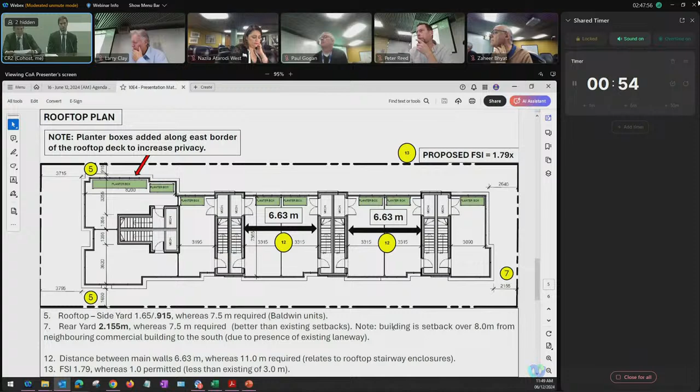One of the neighbors we met with asked, can't you do a higher residential apartment building? The answer was no. We don't have that size of lot to do that, and our client was really committed to providing ground-related housing and taking advantage of the laneway housing provisions. To be quite honest, we met with planning staff who were quite happy with this scheme after we revised it from the original one back in 2021.

Those are our submissions. Thank you very much, sir. Panel, any questions?

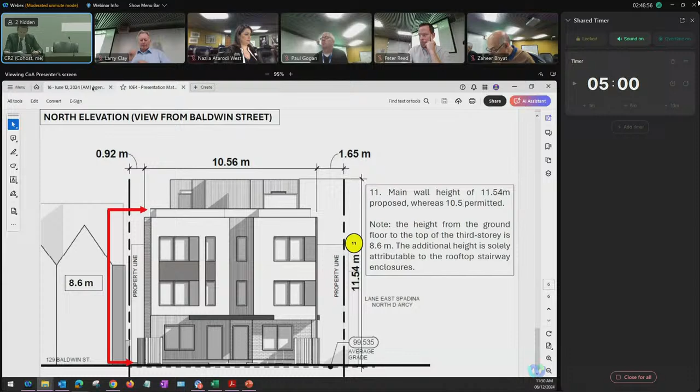Through you, Mr. Chair, we'll hear from the owner at 129 Baldwin Street. Daniel Ma, you have been unmuted. Hi, thank you, good morning. This is Daniel, representing 129 Baldwin Street for my mom's property.

So basically, with the rooftop that they're building, 7 of 8 rooftops are going to have a building terrace facing east, overlooking everyone's backyard. I believe privacy will be pretty much compromised with a lot of balconies, and having a rooftop balcony creates more noise pollution in the area.

So basically, with all these balconies, it kind of breaches privacy where there's kids playing, people gardening, lounging in the backyard, any gatherings we can have. I guess when people build fences it's to have privacy, but now this overtowering building kind of overlooks everyone's backyard, an invasion of privacy.

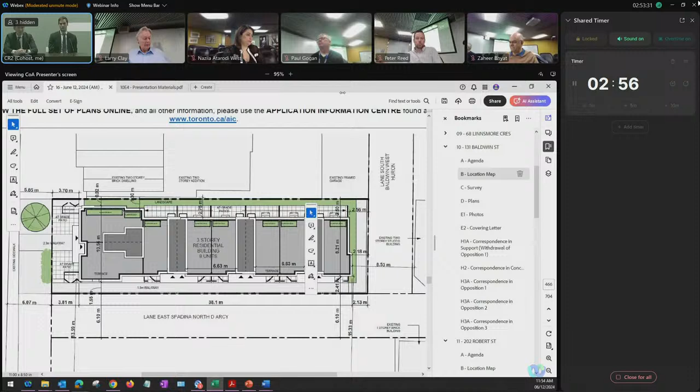Let's take this into committee. Zaheer? Thank you, Chair, I'll start off. I think this is a really interesting project, given the existing structure and the proposed changes. I think it's a really, really interesting one.

I'm also very glad to see that there's quite a bit of setbacks on, I believe, both north and south sides. The consistent concern that seemed to come from the residents on the east side was privacy issues, and I think both the setback as well as the planter boxes that are going to be placed on the rooftop will certainly mitigate that issue. So I think this is a really, really good project that I would support without hesitation.

The only condition, I believe, is forestry number 3. And I'm just going to go out of committee for a second - you suggested tying it to plans? Substantially in accordance with the plans with particular reference to the planter boxes. I agreed to do that with planning staff. I thought they would have sent a letter asking for it, but I agreed to anyway, so it should be there.

Through you, Mr. Chair, for clarification, I would suggest site plan, elevation plans, and the terrace plan. Yeah, that's not floor plans. Yeah, that's a good suggestion.

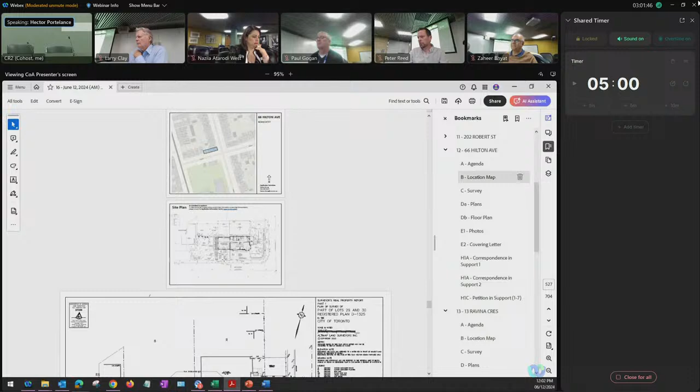Along the south side, it's a corner property, so there's actually quite a bit of side yard, except that it's mostly a city side yard, but it does give quite a bit of green space that is used by the residents. Along that side, we're lowering grades because there's quite a steep slope, and by lowering the grade of the existing driveway, we're mitigating a lot of the rainwater issues running out into the street. We'll be containing that much more appropriately onto our property.

I believe our proposal is greatly improving the aesthetics on that side of the house. The existing house needs an upgrade. I do believe it's giving us much better curb appeal to that side, which is also beneficial to that neighborhood.

Because of the small lot, it seems like we're asking a lot, but the addition, when you look at it with the city property, is quite in scale with what is around that neighborhood. There are several additions in and around that are as large as what we're asking, like across the street on Nina, number 64 Hilton. Although it's all new construction, it was a tear down and rebuild. The volume of the house, the length and the height are very close to what we're proposing. So again, I believe it's in scale and keeping with the neighborhood.

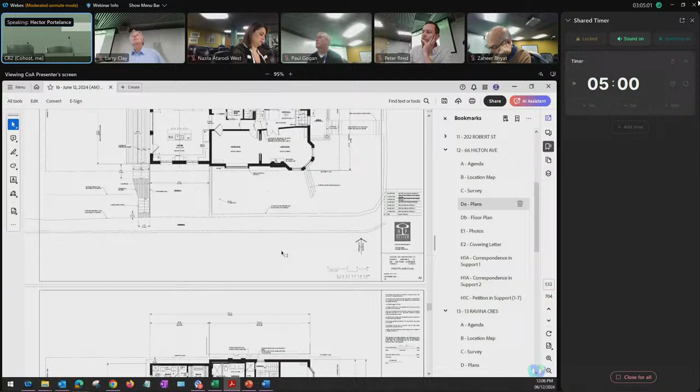There's a deck at the rear of the first floor, on the north side, that might require a privacy screen, as there might be overlook over your neighbor's property. Yes, we've had a discussion with the owner, and in fact, both for the benefit of the north neighbor and for their own privacy, we've decided there should be a privacy screen.

Sorry, I had difficulty hearing you at this end. He's good with it. He's good with it. Oh, perfect. Thank you. Yes.

Okay, any more questions? All right, let's take this into committee. Thank you, Chair. I think this is a very reasonable application, and the explanation about variances 2, 5, and 6 reduces my concerns.

So I'd like to move approval of this application with just one proviso, that the north side of the rear deck be provided with a privacy screen of 1.5 meters. There is a forestry condition. I'm sorry, I must have missed that one. Forestry condition, thank you.

All right, motion to approve by Mr. Bhyat, seconded by Mr. Reed. All in favor? You have your approval, sir. Thank you.

All right, we move on to item number 13, Ravina Crescent. This is an application to alter the existing 2.5-story semi-detached dwelling by constructing a rear third-story addition with a walkout balcony. There will be a total of 3 residential units on this lot. Committee has before it a copy of the plan of survey, site plan, floor plans, and elevations, an arborist report received April the 11th, and correspondence and support from 1 Ravina Crescent and 24 Hunter Street.

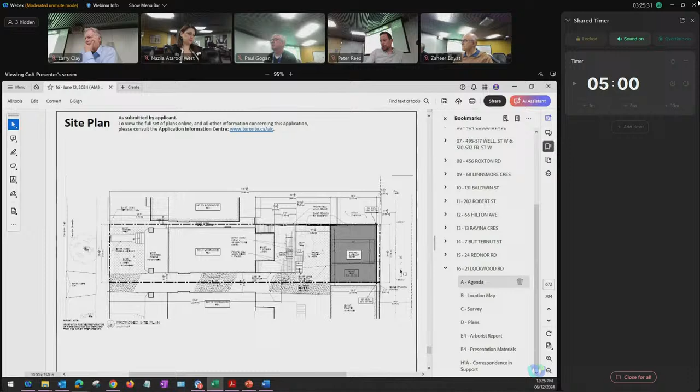Any further questions? Just a comment - Paul, again for the new addition in the back, I'm always surprised I don't see a setback requirement for that building. I think it's because it's indented by both sides, right, it's almost like a little mudroom off the back. Yeah, it's existing too - no, I'm talking about the laneway suite itself. Oh, there's no setbacks to the property line for the laneway suite. Obviously off the laneway there's a setback. Anyway, I'm making a comment.

Okay, all right, let's take this back into committee. Thoughts?

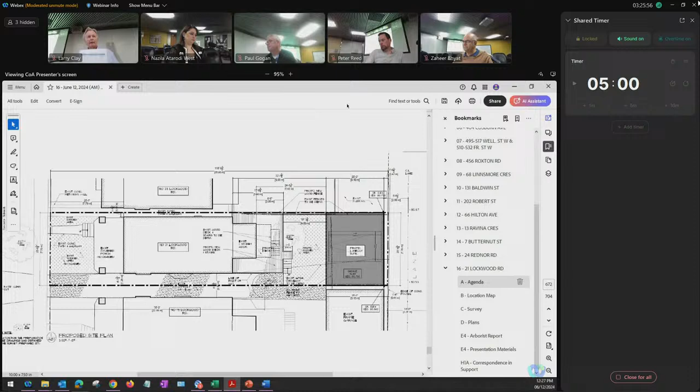Peter? Thanks, Chair. I think this is reasonable. I share Zaheer's concern, and I think there probably could be a few square meters shaved off the deck, but I don't know how much of a material change that would make to the environmental impact of what's being proposed. I think it's reasonable, and it's admirable that they've designed the laneway suite to fit within the variances.

I'm going to bring forward a motion to approve the application because I think the variances are minor, but I would add a condition that the ground or surface underneath the rear deck be constructed of permeable material. Motion to approve with that condition, no other conditions. Do I have a seconder?

Ms. West? All in favor? Zaheer, you're opposed? Yeah, okay. You have your approval with that condition, sir. Thank you, and with that we'll conclude the morning session. We return at 2 o'clock. Thank you all.